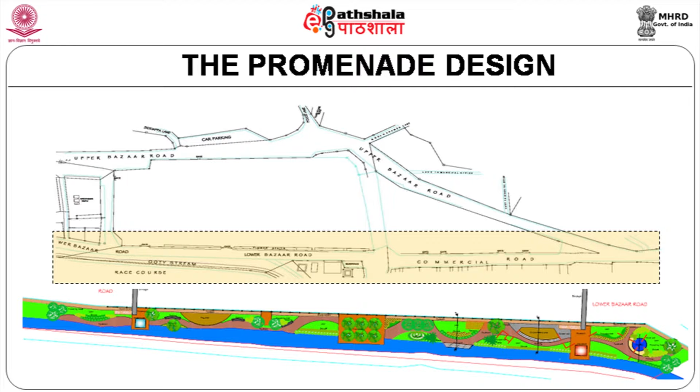So the promenade design has a glass house, sitting areas, stone bollards, shrubs, flowering, and you can also have a fireplace.

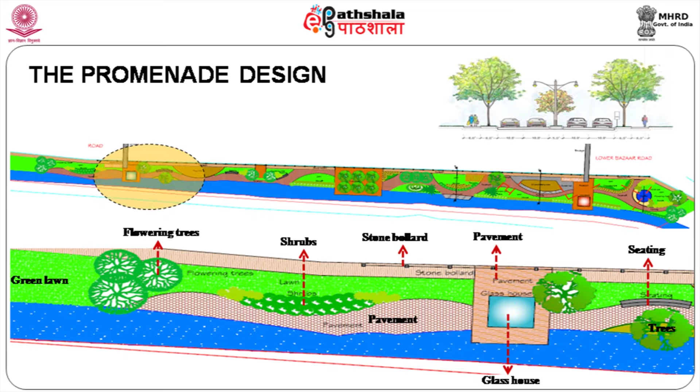So this is how it looks. You can see the rivulet, Padithurai, glass house, and then a bridge crossing from this side to that side. With all the amenities, this will make the area very very attractive. Number one, attractive. Number two, usable. Number three, provision of all the facilities for the people. We have to think really something different.

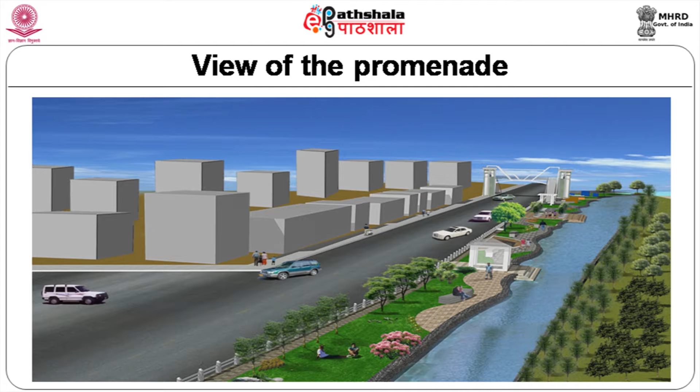Then we are talking about the bus stand. It now occupies only around 30 buses. The same space we'll be able to accommodate around 70 buses. A car park is designed next to the bus stand, where more than 500 cars can be provided. In the bus stand, you can have amenities like dormitory, ATM, restaurant, and all other facilities which are part of a bus stand.

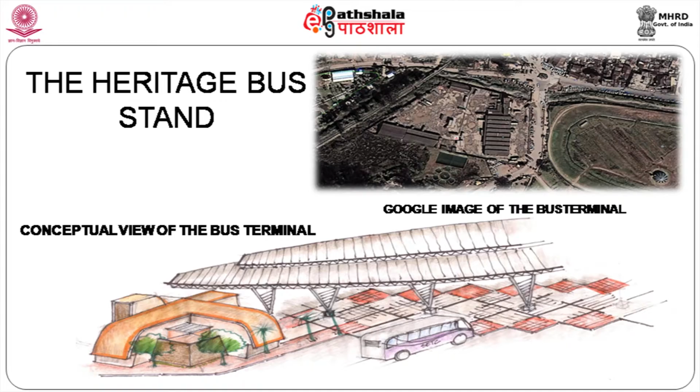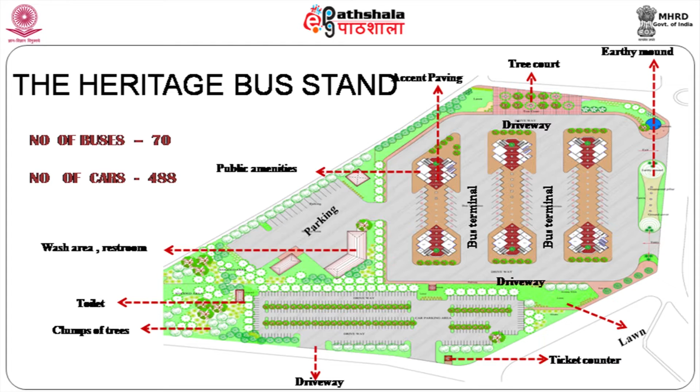So this is a plan of the bus terminal with parking below. Again, you have enough buses parked and enough space for the garage and repair space. You have two levels of accommodation, restaurants and toilet blocks, everything provided. So all the amenities are in one stage, plus the usual treat of the bus stand, with enough shops. So all planned.

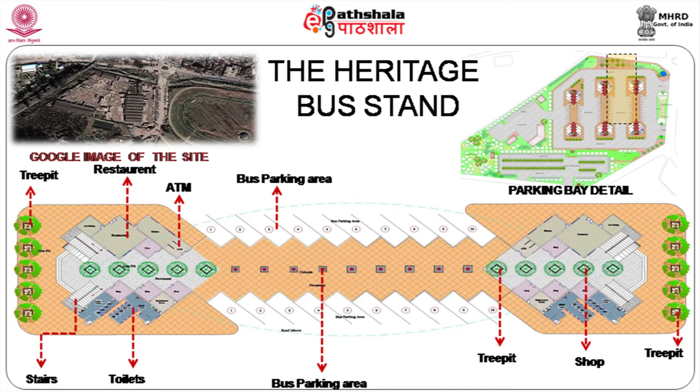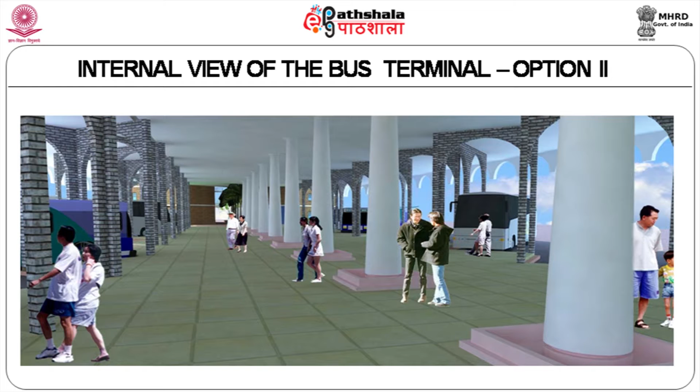And we are coming to the market area. Presently, the market area comprises roughly around 5 acres of land. Now we have around 1300 shops there. So how are you going to accommodate all of them? You need to have open and closed shopping areas available in this zone. Now the present shops are open, open to rain and shine, everything.

So in the proposed area, different levels are available. As you all know, Ooty is a hilly terrain, so different levels are available. Level 1 has the parking and road. Your promenade starts after 50% of the road area. Then you have enough open spaces in the design of the market, along with amphitheaters, exhibition spaces, and different levels of markets available.

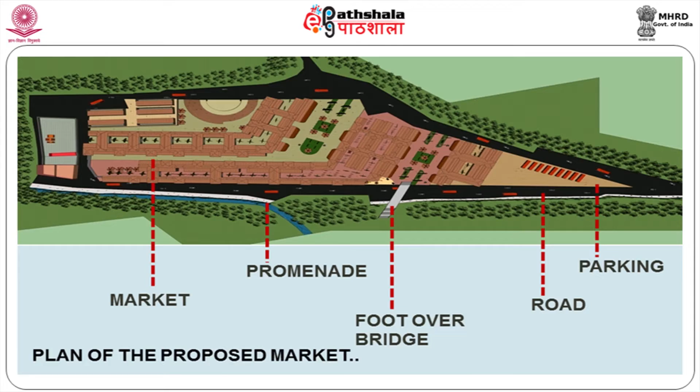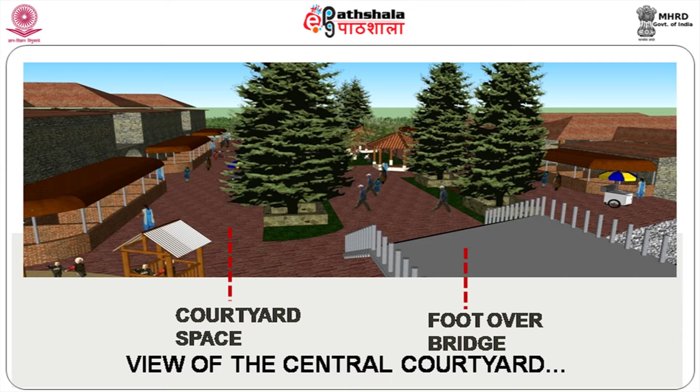So ultimately, you have plenty of rain, so you need to have a slope roof so that water will not go into the shops. These temporary shops are provided so that people can really use them on a daily market basis or a weekly market basis, depending upon the usage pattern.

Then it's basically an urban designer who is very important in this kind of planning where it's an activity based planning. So what is the activity in this zone? What are the requirements in this zone? Then based on the requirement, how are you providing the facilities, and then how will these facilities contribute to the urban design of this area?

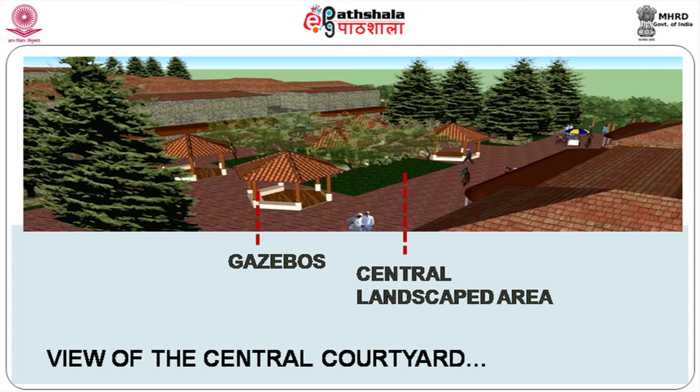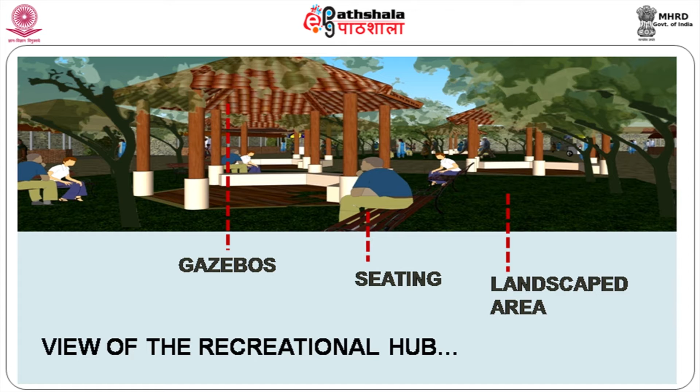You can see some more views of the rain shelters or gazebos. We also think in terms of a large landscaped court with pine trees around, for people to sit, with benches and rain shelters.

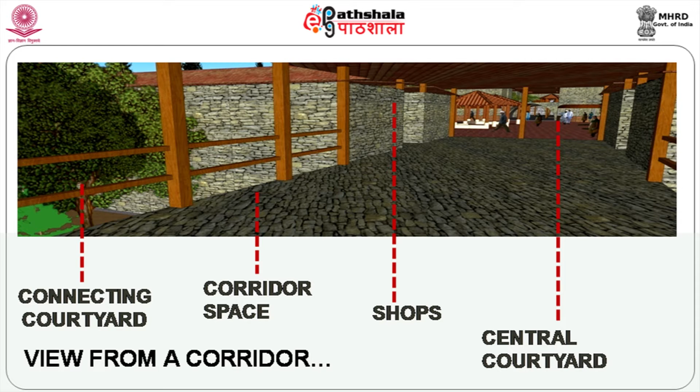Connecting corridors of a different level, different materials are used. Again, connecting corridors with a tree growing in between the corridors.

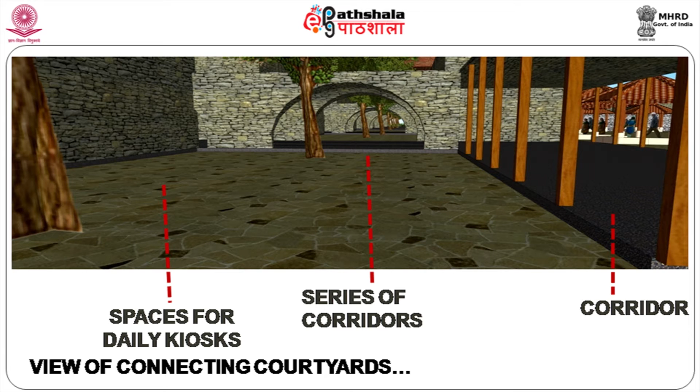Shopping areas, kiosks, central courtyard area.

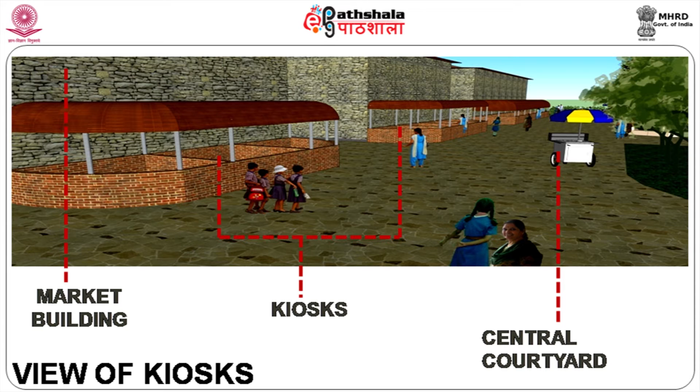You can see the service core is located in such a way that all the service activity will take place in between the buildings. So in front of the building, all the shop selling will happen. Behind the building, you will have all the waste and other services taking place.

So this is how the levels have been taken up in this particular campus.

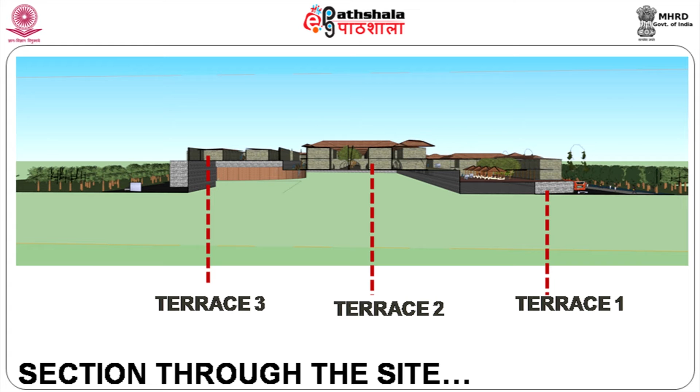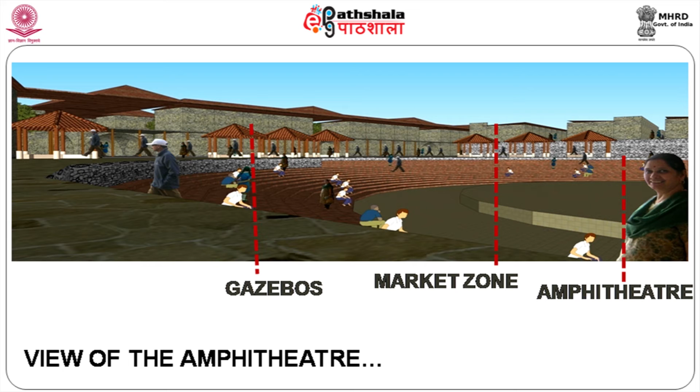Again, view of an amphitheater wherein cultural activity can take place. Marketing people can use this as a major advertisement campaign area.

Basically, we are looking at relocation of the car parking area. There is no defined parking near the promenade. The land provided is huge, and we have been able to accommodate around 400 cars, 15 buses, and 300 two-wheelers, with a driver's accommodation. Everything is taken care of, so that the entire chunk of parking has been shifted from the promenade area to this area, so that people have space to walk.

We are totally forgetting something, what is called the activities of the people. We have just been making them get down at the appropriate place and then get up again at the same place. We should know how to walk. That is the basic idea of this particular planning.

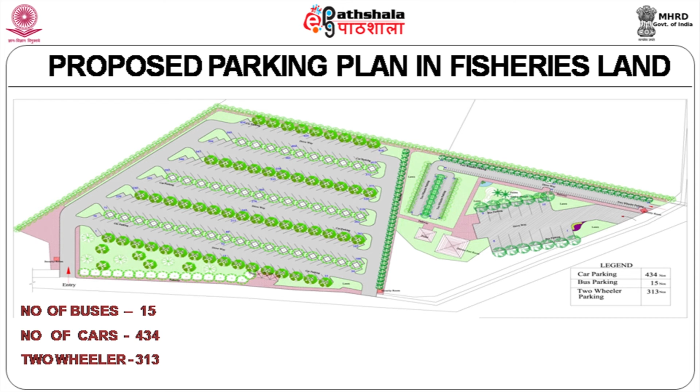So your parking requirements have been taken care of. View of the bus parking, car parking area, and two-wheeler parking.

Actually, I was thinking very drastically in this particular project about how to improve the quality of water in the lake. Now what I am going to talk about here is a totally out of track solution, but this kind of out of track solution will ultimately give rise to a better environment. There is a small check dam on the other side of Ooty lake where the water overflows into the marshy area downstream. So what they are also planning is desilting of Ooty lake, so that the depth of water is improved or increased.

So in this context, my different concept is: in the month of January, December or so, you break open or remove the shutters of the dam on the Ooty lake, allowing the entire water to escape through the marshy area, so that your lake becomes totally empty. And you can do all your desilting activity in a 3 month time on a war footing basis.